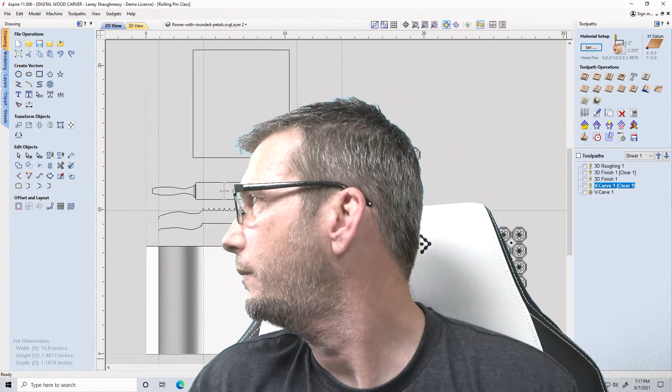As you can see, I already have a project kind of pulled up to show you. I want to talk to you about some different designs and patterns and things, because we have the holidays coming up—Halloween, Thanksgiving, and Christmas—and these decorative rolling pins create really nice embossed pastries, cookies, and things like that. For those of you that have some type of rotary axis, I want to show you a little bit of that. But I also want to talk about creative ways of creating designs, maybe a frame pattern or some background texture, some really neat ways to create different elements for your signs and stuff as well.

So it all goes hand in hand. We are going to have some rotary stuff, but we're also going to talk about creating arrays of designs, node editing, and layout. Hopefully from this class you'll pick up some useful information.

You guys do well. And Russ, hopefully you have a good time at the Houston Woodworking Show. That's going to be cool for sure.

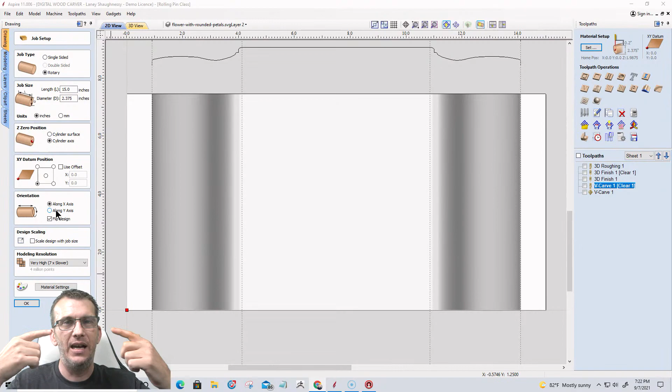And the XY datum is going to be at the bottom left corner. Always, for a rotary axis job, it's generally the bottom left corner that you're starting from. My particular CNC rotates around the x-axis, so the y-axis revolves or wraps around that x. For those of you whose fourth axis might be oriented differently, your x-axis values may revolve around your y—so basically you would just rotate everything 90 degrees. Okay, cool, all right.

Let's go ahead and get out of this. That's our job setup, and let's go into our models and turn off this current model here, and let's talk about what we've got going on. So this little mock-up here—let me get it on the screen. There we go, this mock-up here, this is what our rolling pin is going to look like.

It's going to have an overall length of about 13 inches. The actual rolling pin itself is going to be roughly around 7 inches, and then we're going to have our handles. Now this is going to be one solid piece, not separate handles that stay stationary while the rolling pin is rolling. It's going to be kind of a one-piece rolling pin.

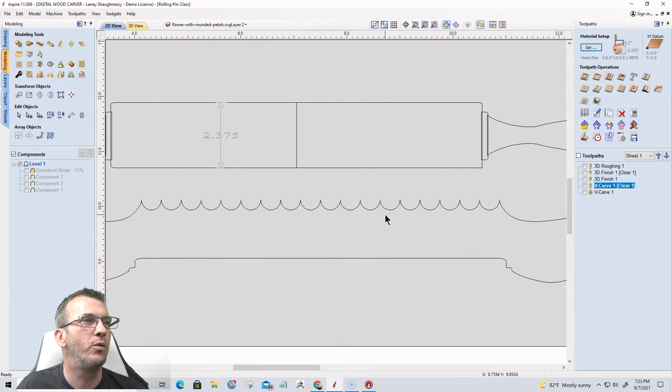There are going to be a couple of different profiles that we're going to look at, and that's these shapes here. The lower shape, the lower profile, is just the basic rolling pin design, but the upper one is going to be a pasta cutter. On this pasta cutter, it's going to cut pasta strips about 3/8 of an inch wide.

So basically what I did is I drew out the overall size of the rolling pin. I put my radiuses on it where I wanted, and then I came up with a handle design. Now on the handle design, I started off with a very simple rectangle, roughly about the size that I wanted. The overall size from top to bottom of this handle here is about 1.5 inches.

So let's go over here and go 1.5 and click apply. I'm sorry, that's not 1.5 inches. What the hell am I thinking? Let me measure—that's not 1.5 inches. Lord have mercy, Laney. Let's see, from here vertically we're gonna measure. From here to here, we're about—okay, about 3/4. I don't know why I was doubling that.

So let's go back into that shape tool and make that 3/4.

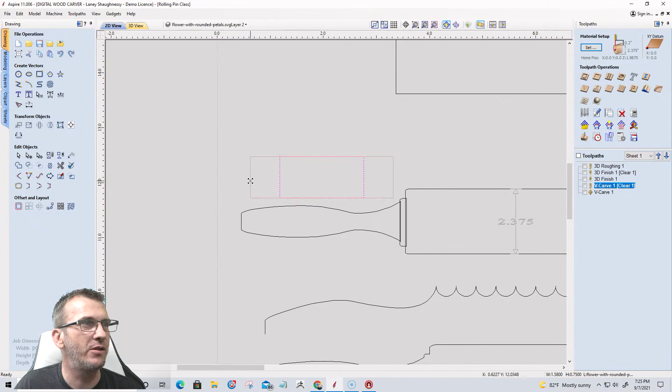0.75. All right, let's go ahead and stretch it out. I'm going to hold the shift key while I stretch this so it stretches out in both directions. And then from here, it was kind of just like, okay, what would be a comfortable grip?

There are rolling pins, many of you know, and I wish I had some reference pictures, but there's rolling pins that are just solid, almost like dowels. They may have a taper in the middle, tapering down. We have rolling pins with kind of a handle size, with the larger diameter. There's all kinds, and straight dowels where it's just the centerpiece, usually used for embossing cookies or pastries and things like that.

So the handles aren't a requirement, but for me, in the rolling pin designs I like to create, I do like to create the handles. So that's kind of where we're going to go with that.

Basically it comes down to what is a comfortable shape for a handle. So I went into node editing mode, and first thing I did is turned both the upper and lower span into a Bezier curve, so I could start to adjust my curve to get that general shape. And I want a nice transition.

Then I came over and said, okay, I want it to taper in thin, widen up a bit, and then start to taper down again. So I took my upper and lower nodes here on the end, and started to bring them down a little bit to what I thought was an acceptable size.

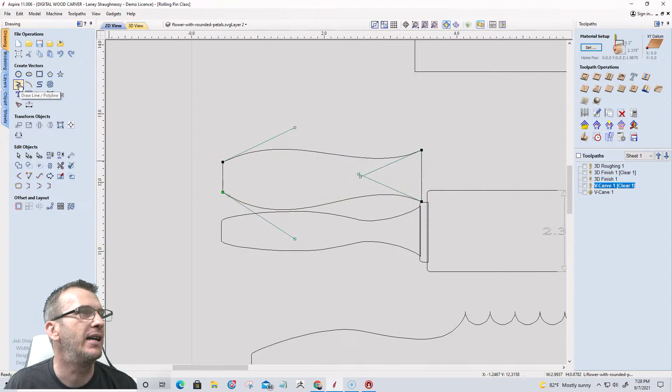So if I take a line and snap it through the center here, 90 degrees, then I can focus on one side of this handle more so than the other side. I can start to get that taper and that feel that I want, and that curvature.

Once I'm happy with that, let's move this up off the rolling pin. I can simply snip away this lower half and then mirror it down. So in the mirror tool, I'm just going to use the bottom, flip to the bottom. I do not want to flip about center, I just want to flip to the bottom.

And from there, I can now come in and trim away my center line and stuff. And if it doesn't trim, I can go back into node editing, and pull this node up just a little bit, and pull this node up just a little bit, so there's a little bit of an overlap in there, and then my scissors will come in and trim away.

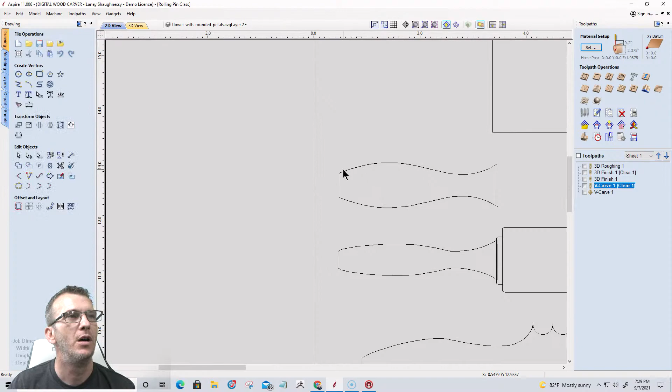The problem with doing that, though, is I've actually created an overlap on my two ends. If I zoom in, you can see my pink line is overlapping now, and I'd have to fix that overlap. Really the best way is to go into node editing and just delete the two spans. Let me show you how to clean up the overlap.

Let's do the overlap first. Basically, I'd go into node editing mode and simply pull this back till there's a gap. I would select both of my lines and join with a straight line. That would get rid of that overlap. Same thing over here, it would do the same thing as well.

But let's do it a little bit cleaner. Let's get rid of this and bring our lines back here. Now, instead of moving the nodes up so I create the overlap and trimming away, that kind of screws me up on the ends.

It's very simple: just come into node editing and put your mouse over this line, right click and delete the span. Select this one here, right click and delete the span. Done and done. So you would create whatever handle shape that you think would be comfortable.

From time to time, I may just carve a handle on a scrap piece of wood to see what it feels like. I might even go over to my lathe and shape a handle that I think is comfortable in my hand, then bring those dimensions over into Vectric and create them, rather than just free drawing it. It really depends on your workflow or your thought process on how you think about things.

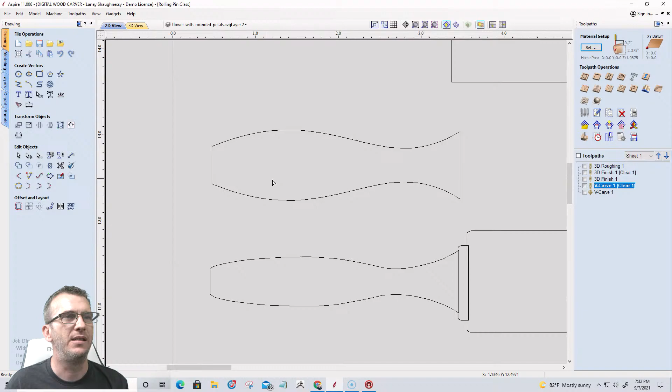So once I had my handles laid out, I knew what size I wanted the rolling pin to be as far as diameter. I wanted it to be about a little over 60 millimeters, 2 3/8 inches. And I wanted that rolling pin to be roughly about 7 inches long. That's what the shape is.

So if we go to the size tool, on this drawing here we're about 7 inches in length. It shows a height of 1.18, but this is just a mock-up drawing. It is actually 2 3/8 inches tall, this part here. Trust me, it is. It says it right there.

If I go into my measure tool and measure vertically from here to here in my drawing, it's only 1.18, but that's why I have the 2 3/8 there, because I'm just simulating what I want. I don't necessarily have to draw the whole thing, but it is easier to do that if you wanted to.

Now, let's go ahead and get rid of this. I'm going to get rid of this center line as well, and I'll get rid of this measurement. If you want all of this to be sized up appropriately, like in our middle here, go ahead and size it. If I go in here and turn this off because I want it to say 7 inches, I go 2.375, or 60 millimeters.

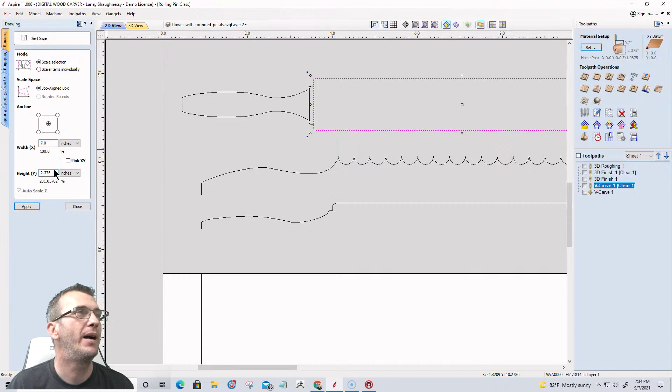By the way, let me show you, you may not know this. I'm going to go into the help menu and into the manual just to show you where it's at so you can read more about it. In the manual for Vectric, the list on the left hand side, if you scroll down that list, you're going to come down to our variables. Bear with me.

Right here are the calculation edit boxes. This will show you different keyboard shortcuts for doing things like pi, thickness, X, Y, and things like that. One of them is imperial conversion or metric conversion - M or I is your keyboard shortcut.

When you're inside any of the value boxes, you can use M or I to convert metric to inches. If somebody gives you a plan that's in metric, you can convert that very easily. 25.4 is your conversion rate, so it would be millimeters divided by 25.4 for inches, or inches times 25.4 for millimeters. You can use M and I in the software.

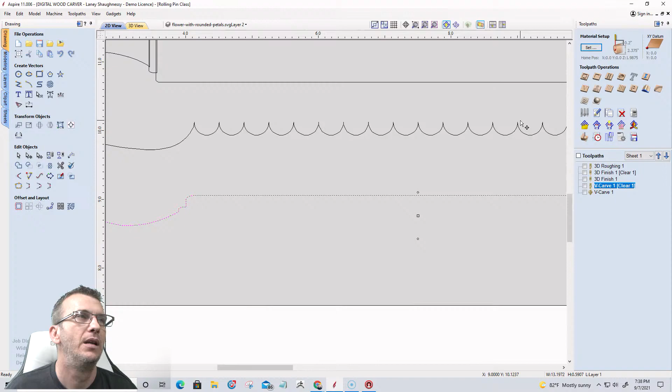I'll show you that when we do the modeling, but that's going to create like a pasta cutter. So get your profile drawn out and then create two guidelines - these are going to be our drive rails when we're doing a two-rail sweep. This is what we're going to sweep that profile along. So in the modeling tools in Aspire, I have what's called a two-rail sweep.

I'm going to show you how to do this with a regular rolling pin or the pasta cutter, and also using the molding toolpath for those of you with desktop and pro. But let's start with the two-rail sweep. I'm going to select my first drive rail on the left, my second drive rail on the right - that's my selection. Then I'll pick a profile, either one works for both. I'll sweep that profile, scale it to the size of the spans, sweep it between those spans, and click apply to create the model.

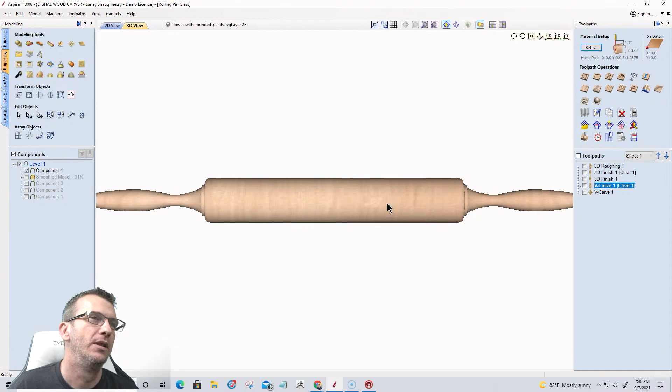If we close out of this for a minute and look at our 3D view, you'll see our rolling pin here, and that is basically quite thin. We need to fatten her up a little - this is too skinny on the handles and the rolling pin. It's not sized correctly because I was drawing fast.

So here's the deal - from, let's bring the guideline down to here. This is my radius. My handles and rolling pin need to be 60 millimeters. If I'm going to go 60 millimeters or 60.325, I need half of that - so 30.1 and some change. Let's look at what size I have here.

And then we're going to draw this from scratch. So let's go from here to here. I'm only at a half inch, right? 0.59 inches. That means when I roll this pin up, when I sweep this profile and roll it up, I'm only going to have a 1-inch diameter rolling pin. That's definitely not what we want. We're shooting for roughly 2 3/8 inch diameter, or around 60 millimeters. We've been talking about that all day now.

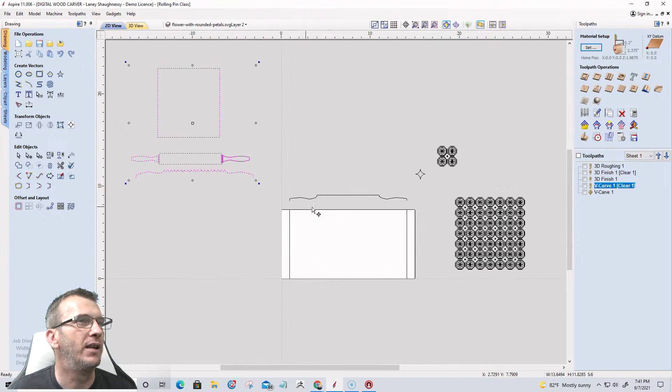All right, let's go ahead and change this up. So this profile, let's get all this stuff out of our way. Let's select all of these things and move them over here for the moment. Let's turn off our grid lines for just a minute. Well, no, let's turn them back on.

On this grid line, I need this shape to be 60 millimeters, or 2 3/8 divided by 2, and you know the radius. So I'm going to go into the properties of this bottom guideline and create a relative guide. 2.375 divided by 2 equals 1.1875. When I create that guide, it's showing me that guideline here. Let's get rid of this one, delete, this one right here. That's what my profile should be up, size should be up to.

So I'm actually going to scale this up. There we go, and that looks more like it. I'm going to scale that up. My handles are going to be the right size now and everything.

And we're going to do the 2-rail sweep one more time. Let's go in here, turn the guidelines off, and let's select this. Select this. Go into our 2-rail sweep tool and make that our selection. Make sure those lines that you draw are sweeping across from top to bottom. Make sure these arrows on the red and green line are facing the same way, not opposite. So that's our selection, this is our profile. We're going to click apply to sweep that.

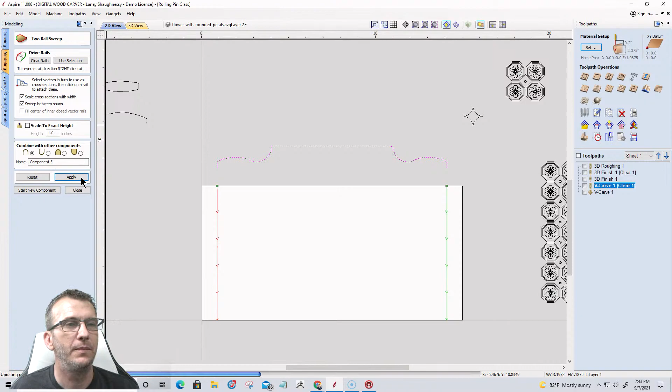And let's turn off the previous one we made. Actually, let's delete it to keep things clean. I'm going to delete that previous one. And let's go in now. That's what my rolling pin should look like.

All right, so now when it's generating its preview, it's going to be distorted. Every time I move this thing around, it's going to be distorted. But let's leave everything alone for a second, let it catch up to itself. And you're going to see that nice little transition disc I have here into that rolling pin on the handle. Let's move this out a little bit so you can see that.

Okay, so make sure that your profile is of the appropriate size, is the radius of what you're doing. So if I were to unwrap this, my profile shape, make sure it's sized appropriately before you do your sweep, or you end up with a little stick of a dowel like I had a moment ago. So this is what our part looks like unwrapped. All right, cool, let's see here.

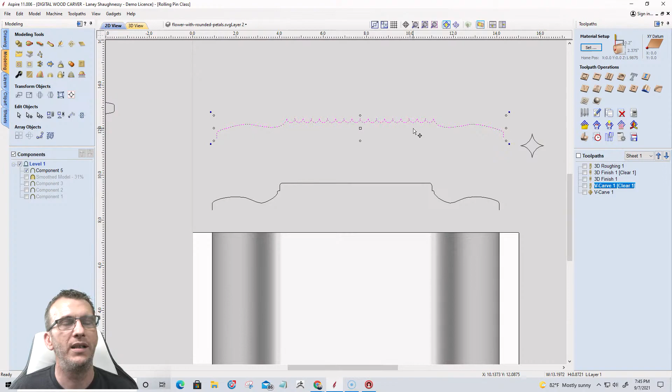Before I do that, let's go over and look at our pasta cutter. Let's come in here, and I'm going to do the same thing with the pasta cutter. I pretty much want the pasta cutter profile to be the same size as my rolling pin, but I want it to have those nice spikes in here. The thing is I need to, if I were to measure this, because I want my strips of pasta to get cut a certain size. They're either going to be 3/8, an eighth of an inch, like if it's angel hair or something. I'm not an aficionado on different types of pasta, but the size of my little gullets there need to kind of correspond.

Now, if I were to measure this right now, let's go from here to here horizontally, from here to here, you know, I'm at 3/8.

So I don't want to really distort this design too much. I don't want to stretch it lengthwise or anything, but I can stretch it upward. I'll just have to do some adjustment on the bottom of my gullets, but I don't want to stretch it long ways, because that's going to stretch my teeth apart, my little grooves apart. So it's already sized appropriately, but if I bring my guideline in here and snap it here...

And I measure, actually to the outer points of the gullet. If I measure this vertically from that guideline up to the top of one of those points, I'm only at 0.888, so I'm only going to get 875 and 875 — what is that, 1 3/4 inches in diameter — and that's not what I want. I want a nice, decent size pasta cutter, so I've got to stretch it up as well.

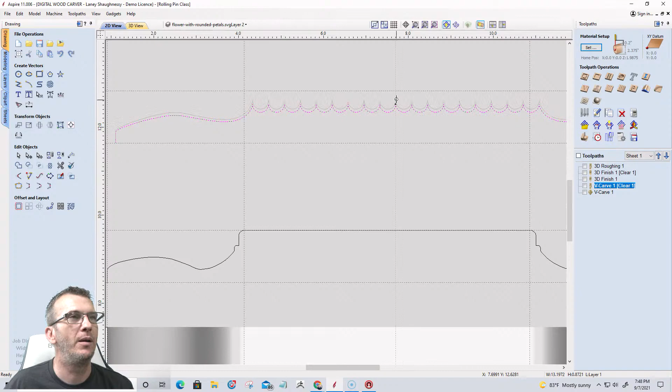And it's because of how I drew them. I was just laying out everything, but I need to bring everything up the same way I did with this lower one. So once again, I'm going to create a relative guide, and that'll show me what my points need to be brought up to, so I can drag them up here to get that height.

It doesn't really too badly affect my gullets — it made them a little deeper, kind of stretched them out a little. But I can shallow those up a couple of ways. I can go into node editing mode, select all of these nodes across the bottom here, and use my up arrow key to reduce those gullets. I don't need them too deep, so I can reduce them in a bit. What's important for me is that my points to the radius point, the center of this, is the right size.

So let's take a look at this pasta cutter. Let's turn this off. Once again, we're going to select our drive rails in our 2-rail sweep, and we're going to select our pasta cutter here and click apply, apply that across. Now I definitely don't want these nice sharp points, which you'll see in just a moment.

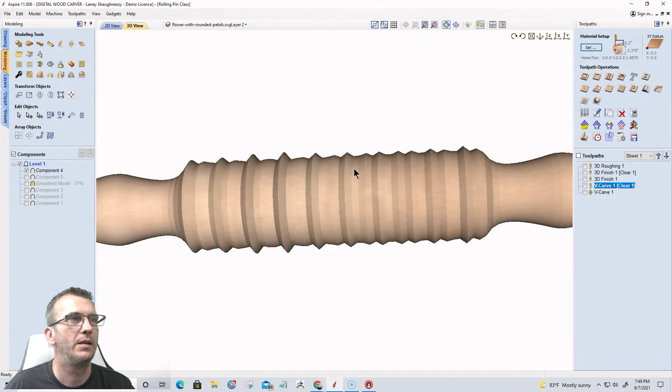Let's go into the modeling toolpath in the 3D view. Let that regenerate itself — it looks funky when it's not generated properly. All right, let's turn it sideways like this. On this pasta cutter, I definitely don't want these sharp points, okay? I want to blunt them up a little bit, and that smoothing is going to help me with that.

So let's unwrap this into a flat plane, and you can see those spikes in there, those sharp edges. Even though this is going to be a pasta cutter, I don't need something that thin and sharp to cut the pasta. So I want to slightly round over those sharp tips, and I'm going to do that with the smoothing tool — I'm going to apply some smoothing to this.

If I go too crazy, it's going to really round off those edges, and I don't want to do that — I just want a small radius. If I have no smoothing in it, I've got those sharp spikes, but I just want to bring them down just a little bit, to where I start knocking off that sharp edge. So I'm going to come down just a little to where I start getting that little bit of rounding.

But you can see these kind of white center lines show up there, and there's still a bit of a point. It's nice and rounded, but there's still a little point — it's just not so sharp. Again, if I go too much with the smoothing, I really start rounding those off, so I want to back it off a little. I just want a little bit of rounding.

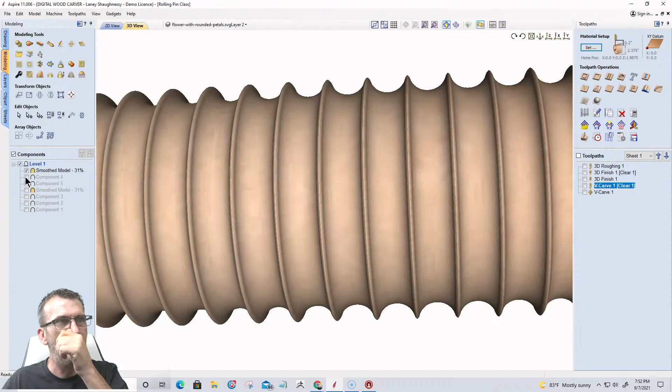Okay, so there's my smooth model. Let's zoom out here, and on this one, since we're cutting dough and pastries and stuff, I'm going to be putting some decent pressure on there. So I want my handles a little bit wider, so you can see they're just a little bit more blunt for me to really push into and everything.

So when it comes to rolling pins, if I was on a CNC where my X values wrapped around my Y, then everything I'll be doing here would be rotated 90 degrees. But my Y axis, the height of my computer screen, wraps around the X for my 4th axis on the DWC 2440. So I'm in the horizontal X, and the Y values are wrapping around that X. So everything I'm doing here, if your CNC is set up differently, where your 4th axis is along the Y, not the X, just rotate everything 90 degrees.

Now let's go back to our previous component, our previous rolling pin. Notice the handles are a little bit more narrow here, because I'd like a little bit of a grip, but I don't want to grip it tight because I need those to spin in my hand. There's not a drive shaft in the middle where the center rolling pin is rolling and my hands are just staying stationary. I've got to let it roll in my hands as I'm pushing down.

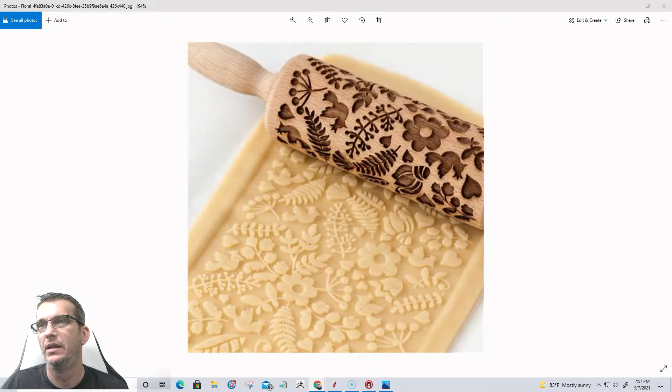And now let me show you an example of a 3D model being carved into a rolling pin design. Let me pop that in—bear with me a second.

All right, let's go back to here and pull this over here. This is an example of a 3D model getting carved in. In this case, this looks like it was probably hand carved, I don't think it was CNC carved. It's a little rough around the edges, but this is a nice little handmade rolling pin that somebody engraved this model design into, and you really look at that pastry and that embossing it created, and it's really, really nice.

You can imagine different types of breads and pastries and cookies, pie crust, whatever the case may be, having some really nice design. I really like that three-dimensional aspect of an actual 3D model getting carved in that negative state into the material, so it creates this positive, really nice embossing. We can achieve this with V-carve designs as well, which you'll see in just a moment, or laser engraving. Some really nice examples there that I wanted to share with you.

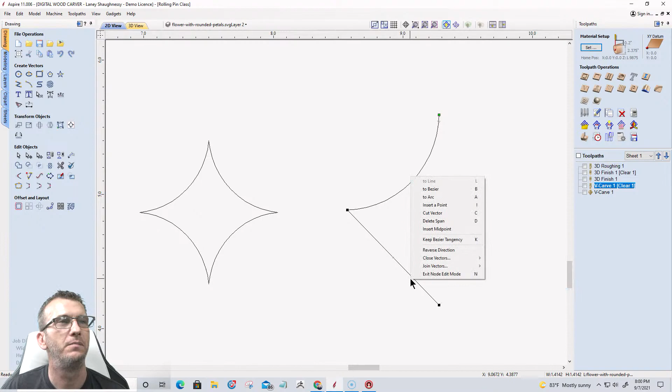Now that I've got that curve, I'm actually going to delete everything else. And then I'm going to take my mirror tool and flip that shape, bottom, left, right, to create that same shape. Take those four parts and join them together. So that's the long way around. Otherwise, it's an internal radius - a rectangle with internal radius to create that same shape. So either way gets you from point A to B, you're just learning the different ways to do both.

Okay, so let's get rid of this. Now, overall, this shape size here, if we look at the size tool, it's a little over 1 inch, 1.0667, and for those of you that are like, 'all right, now he said he was going to use metric,' it's about 27 millimeters.

The 27.09, but roughly about 27 millimeters. To come up with that size, I basically said, okay, I have a 7-inch area that I'm going to be putting this pattern on - that's my rolling pin, the main body is 7 inches. I want to be a little in from the edges, and then I laid these out end to end to see how many or what size I needed to get that nice fit. This was the size I came up with on that 7 inches.

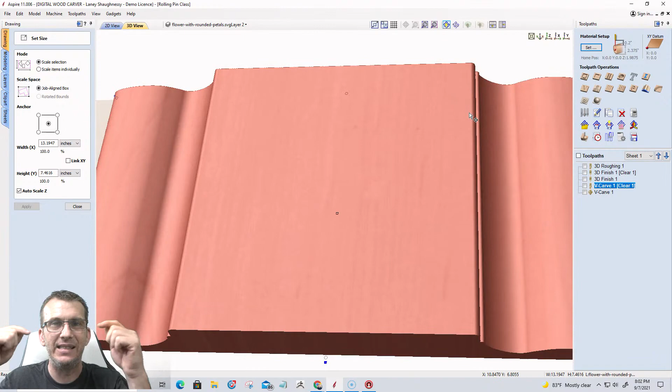So what I'm going to do is grab this and drag it down here. Notice I'm halfway on, halfway off my board. This guideline shows me where my point ought to be - that's where this starts radiusing over on the edge, and I don't want this pattern to fall off the edge into that radius. So I want to be just inside of that. I drew some guidelines to show me where that falls.

But now I'm going to go into the array tool. The goal for this is I want one row to go end to end, side to side, full length. But then I need my upper row to actually - let me draw this out to show you.

Imagine, if you will, that I have these end to end, and then I have another part coming in right here. Snap to the center there. And then if I took these parts—let me take this and this. Hold your shift key, not your control key. There we go. And I bring these two parts up to here. Then I create this pattern where I have this little circle with this little star inside of it, when everything gets laid out.

So I need my parts to go end to end, but I need them to step down halfway on my y-axis. So the x-axis is going to be full length, y-axis is going to be half length. And then I'm going to be stepping over half the design as well.

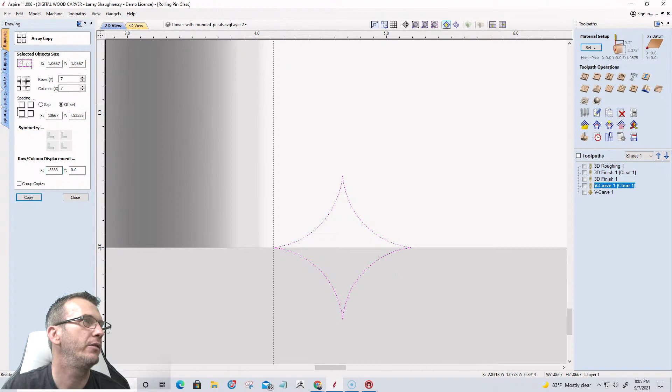And this number here is exactly how much I need that second row, every other row, to step over. So that number is going to actually fall there too: 0.53335. So when I copy this, it'll create—it'll start creating this pattern. Now I only created part of it, but it'll start kind of creating this pattern. You see how they fall into place.

Now let's create the real deal. We have 7 rows, 7 columns. We're stepping over 0.5335 here, 0.5335, and this needs to be 1.0667. And when we create that pattern, you can start to see that pattern emerge. So we have these nice little stars inside these circles when everything lays together.

All right, now I need much more than 7 rows. I actually need 16 of them. So we're going to go select our part, and we're going to go 16. Copy. Okay, it looks all crazy now, but it'll look cool when we carve it and all.

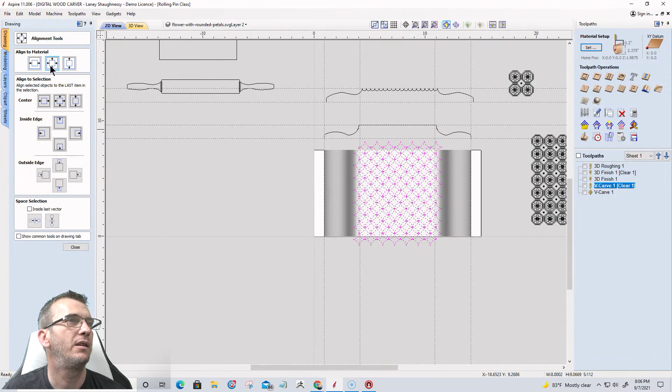And now with these parts here, I want to center them using the align tool. I want to center them on the material here, and then everything outside of my guidelines I need to get rid of. But I don't just willy-nilly delete it, because you're going to play havoc trying to catch up on closed and open vectors and all that stuff. So I'm going to draw a perimeter—I actually have that rectangle right here for myself. We're going to draw a perimeter, and I'm going to center that on my material as well.

And basically it goes right to the top edge, it goes right to the bottom edge, and then here I have it cutting off right at the tip of this part on the left, and right at the tip on this part on the right. Now you're saying, wait a minute, you said you're going to use your guidelines—that's for the next pattern, you'll see that in a minute. This one is tip to tip. I want a nice full circle on each end, so a full circle here and then a full circle here.

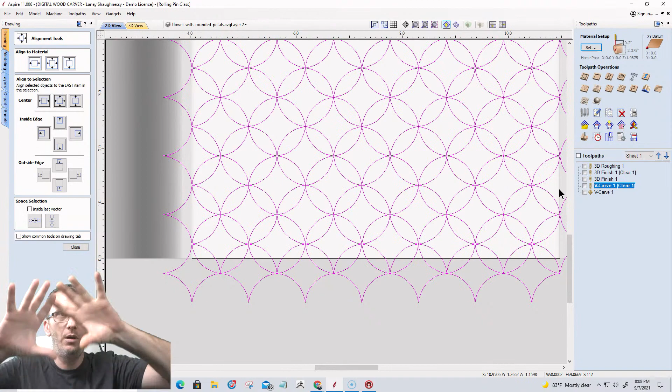So I want that full circle. I'm going to select all my little stars—let's turn this off—and I'm going to hold down the shift key and turn off the rectangle. I don't want that selected first or in the middle; I want it selected last. But first I'm going to group all those stars together so the software treats it like one object. Now I'm going to come in and select my little border last, and go into the trim tool—that's the icon that looks like a little candy cane or barber pole. That's your trim tool. And I want to clear everything outside of that boundary, that rectangular boundary. I want to get rid of everything, so I want to clear it all away. Okay, cool.

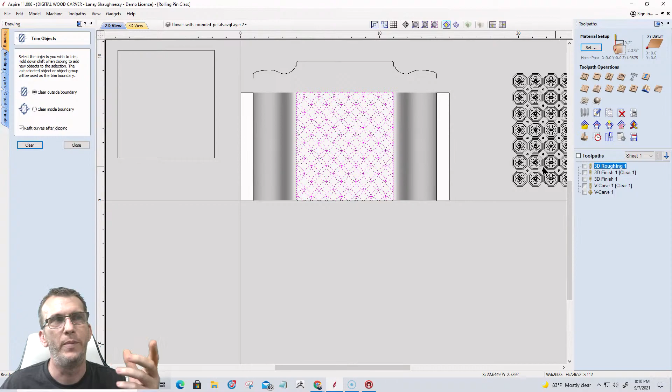But now that I have this pattern here, this is going to be a V-carve. Our first step is to create our 3D rough cut toolpath, then our 3D finish cut toolpath, and then we'll do our V-carve toolpath on this pattern. I'll also show you some other pattern options - I've got one I really like and I'll show you how to make that from scratch. Let's start off with our models visible.

We're going to go into a 3D rough cut. First, I want to go into my material setup and make sure everything is set properly in the center, with no errors - all that wonderful jazz. I'm good. So on the 3D rough cut, I'm going to use a 1/4 inch end mill to hog away the waste material.

I'm going to use the model as the boundary, because my model only goes up to the end of these black boxes right here. I want the outside areas not to be cut, because that's where my spur drive and live center are - or if you're using a 4-jaw or 3-jaw chuck, we don't want the router bit getting near those. I'm using the model as a boundary, just doing a Z-level raster to hog away the waste material, and we'll calculate that toolpath.

That toolpath is just going to remove all that waste material, mostly around the handle area and everything, and it's going to start creating that rough taper that you see here.

For the 3D finish cut, I'm actually using two bits. One is an 1/8 inch tapered ball nose, the other is a 16th inch. The 16th inch literally only does two little strips - it's going to do a bit of touch-up right on these radius edges where my 1/8 inch is a little too big. Honestly it's probably like a 3 or 4 second run, not long at all for that smaller bit. You might decide you don't need it, but I wanted to put it in there. So I'm using those two bits.

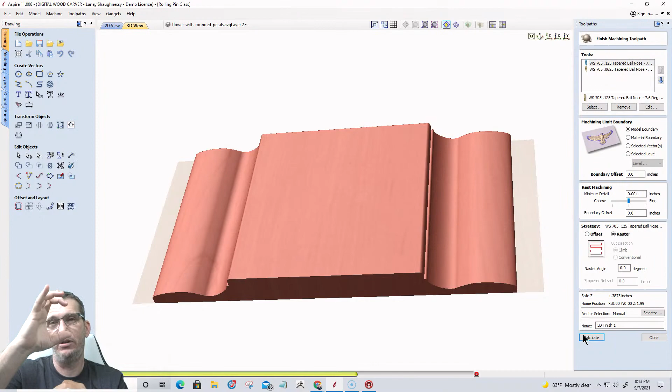Based on our large tooth pulley on the fourth axis and our small tooth pulley, we have that 1/3 ratio for the belt, and our calculation is based on that large diameter teeth, small diameter teeth ratio - it calculates the steps per unit automatically, and it's built into our software. I wrote the code and it's built in. I don't have a video on that, but that might be something I can include next week, Kool-Aid. I can put together a little Excel spreadsheet or something for you.

In our controller software, Planet CNC TNG, there's an automatic function called a step calculator. It's a little code I wrote where you can type in your diameter and it automatically calculates the steps per inch based on your pulley settings for that unit. I could do a short segment on that with an Excel spreadsheet to show you the math behind it.

As usual, Laney, stellar subject matter. Thanks, Dean, that's a hell of a word. Stellar, that's cool, thanks man. I appreciate that, Dean. I really appreciate that very much.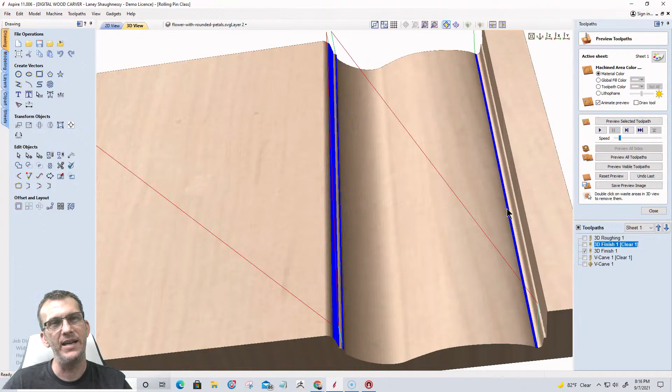This 3D finish toolpath is literally only doing this little step right here where the 1/8 inch couldn't really get in to create that nice little step. Then it's cleaning up this radius on the outside edge of the handle, coming in and just touching up those areas.

Let's see if we can draw the tool there. Is it on the wrong side? It's on the wrong side. Let me see if I can speed that up just a little bit. It might not draw the tool because I clicked that after the fact to show the tool.

There it is. So it's literally just coming in and cleaning up that little transition into the handle, and then it's going to come over and clean up that transition at the end of the handle. We can turn the speed back up - at its most, it's just a few minutes, it's not going to take long to do that nice little touch up.

All right, so now that we have our part, let's zoom back out here. We've got our part cut, and if I wrap it up, you can see where we're at and the two ends there. Those get cut off once everything's done, and then you clean up the edges with a little sanding. But this is our rolling pin before any nice detail or anything is carved into it.

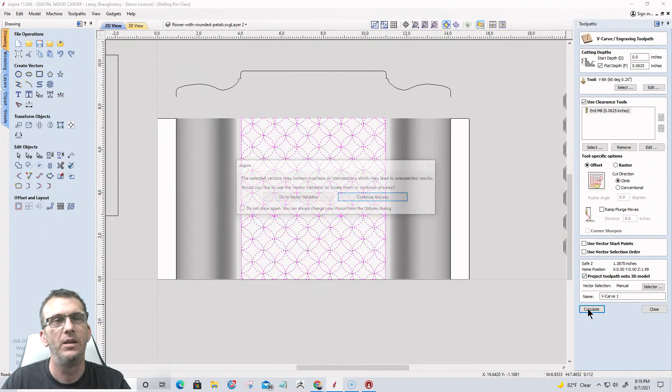Now that warning that popped up is letting me know that some of my vectors are overlapping, and I know that some of my points and everything are overlapping, and that's fine. I want them to kind of be touching, and I'm not going to weld them together or anything. There's no need for it. So let's unwrap this into a flat plane, and let's preview the toolpath.

But wait, there's more. Look, remember I said that the ovals are going to get cut, and the little diamonds, or the little 4-pointed stars, they're going to be raised. Well, that is completely opposite of what I'm seeing here, and that's not good.

I need to reverse that. So in order to reverse that, I got to create a boundary around it to be able to use to almost create that extra line. And that is going to be this bad boy right here that we used earlier. I'm just going to center that back onto the material, and I'm going to select this.

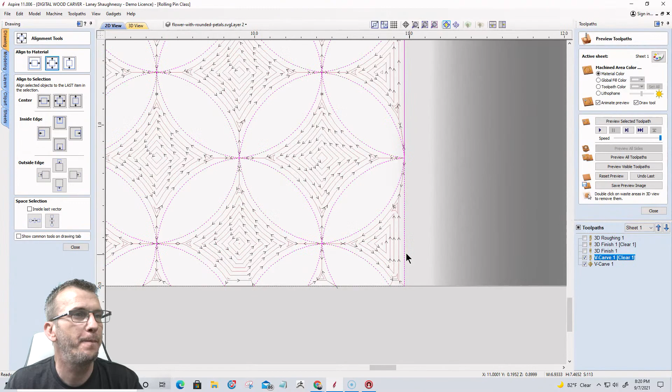Let's undo that for a second. Oh, not that far. Let's move that back over. Where'd my rectangle go? Oh, you son of a gun. Put that back there for a minute.

I want to take, and on the sides here, I want to bring them in just a little bit. So let me turn off these toolpaths. I want to select this whole thing, this whole pattern here, and I'm literally going to kind of slightly squish it in just a little bit.

I mean, literally, I'm going to zoom in really tight, hold down the shift key, and I'm going to bring this in just a tad, not much. Because when I bring this in and center it, I need that small little gap between that rectangle and my pattern. Not a big gap, just a small little gap. I want it to be virtually invisible, so I don't want it too wide. And I'll be able to tell, and I'll show you if it's too wide. We'll see that in the design in just a moment here.

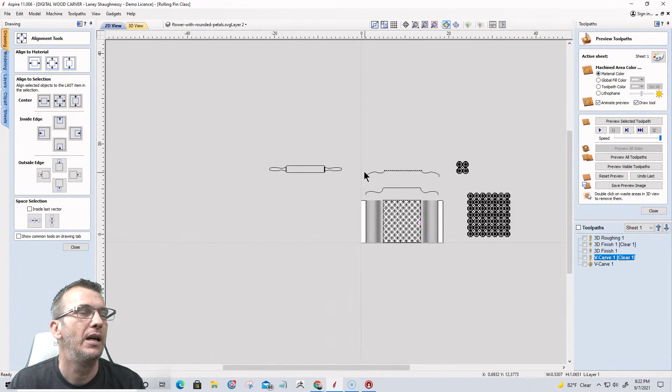So let's look at my height. You see that width right there above? That's kind of really what I want to be on the sides as well. So let me do that. Let me zoom back in. Let me bring that in. Just hold that shift key so it does both sides at the same time. And I really want to bring that in. I want it to be super, super close.

Okay, virtually invisible. All right, now when I select all of this, I'm going to redo that toolpath. Let it calculate. Now you can see that I'm getting the correct cuts.

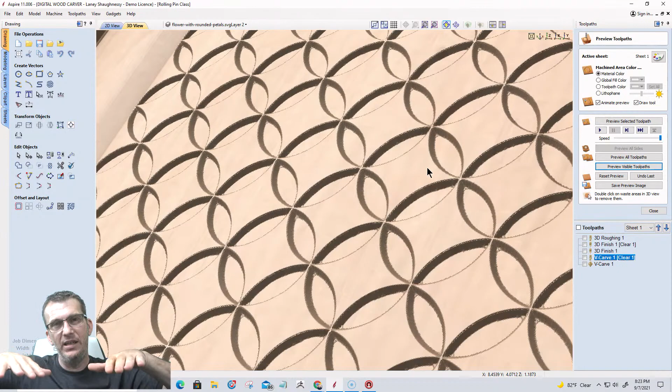So let's preview that visible toolpath and do that carving and everything. And now you can see I've got those kind of stars raised up. So when this cookie decorator gets cut in, these stars are going to get pushed down in, and the dough is going to puff up into these pocket areas to kind of create this nice, cool pattern. Okay, so now that I've got that, let's wrap this up.

Let it focus. Let's turn it a little bit so it's not so whoa on our eyes, and so you can see that pattern here that got created. And this is just using a V-bit and a small end mill. This could have been laser engraved if I wanted to use a laser, or it could have just been pocket cut, straight pocket. I like using the V-carve toolpath because it gives a little bit of an angle, so when that dough goes up, it has a draft to it so it comes back out. It doesn't get stuck on the straight sides. So I kind of recommend the V-carve pattern.

Now the tough thing about the patterns is, the same way I created this, I could create all kinds of patterns for picture frame or molding designs, like embossments and stuff. It could be floral, it could be this, it could be that.

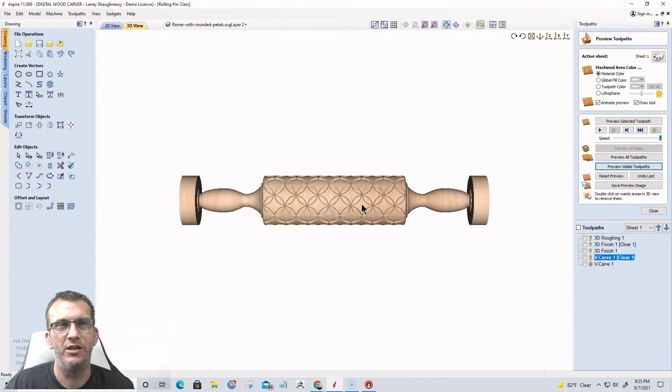I could create this as a pattern for the bottom of a tray, like a butler's caddy or a nice little dinner tray that could have the whole bottom with this decorative pattern. I could really do all kinds of fun things just creating patterns for my V-carving, not necessarily for rolling pins, just in general. These repeatable patterns can be spread across and sized to create all kinds of unique things. With that in mind, let's talk about this pattern here.

Now I'm going to go over to the left and draw it from scratch. It all starts with an image, right? So our vector—let's import a bitmap.

Online, I typed in 'flower petal vector,' and the image I got was a rounded flower petal SVG. If I import that in, let's move that up here—that's this guy right there. So it's an SVG, I didn't have to trace the photo or anything. It came in as an SVG, and all I had to do was get it sized down to an appropriate size.

What I wanted was on each of these octagons, I wanted the outermost octagon size to be about 1 1/16 of an inch. So I started from there, traced my image, and then came into my polygon tool doing an 8-sided polygon. I want to create that shape and have that size be roughly 1 1/16 by 1 1/16 in size.

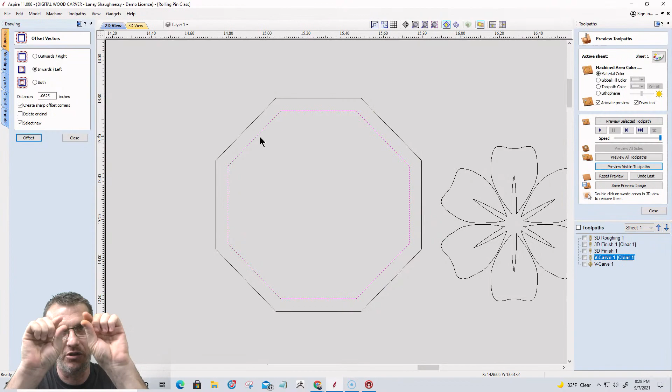And then from there, I want another little strip as well. That vector is going to be offset inward by a 16th, so 0.0625. What that's going to do is create this little strip here, and that part's going to show up really nice in the embossing.

From there, now I can bring in my flower, select that, select this inner vector, and align it to the center of that last selected vector. Group your vectors there, child of mine. These are all individual petals, right? So when I centered it, it shrunk them all up. Group your petals—I'm going to hit G on the keyboard for group, that way I don't have to mess with it.

Now I'm going to select this vector here and align it to the center. I want to size it—and I actually did pretty good right out of the gate—but I want to give it some size and some space.

Now if we compare this one to these, my flowers in these are just a little bit smaller with a little bit more room around. You've got to think about that dough and all that stuff, so I'd agree this would be just a slight bit smaller. Holding that shift key, grabbing one in the corner, bringing it in just a little bit to have that pattern. All right, so that's how we created that.

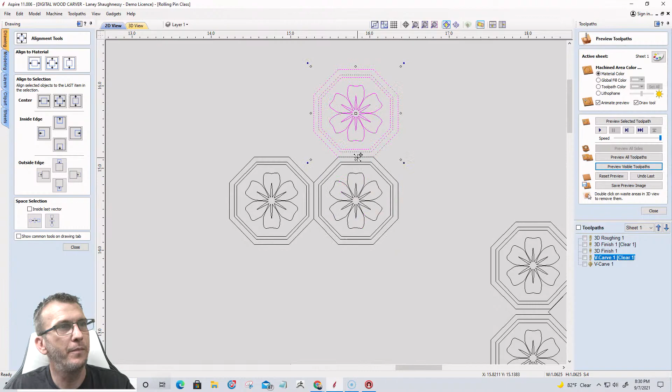And then I'm going to hold down the control key, grab it at the bottom, drag that up here, hold down control, drag this over here. So I have these four. Now I want space in between. That's going to create kind of a lattice work, a grid.

So these two, I want to do about a 1/16 of an inch of space, so I'm going to move them up on the y-axis relative a 1/16 of an inch. Then these two on the right, make sure you get all the vectors, I'm going to move them to the right a 1/16 of an inch. That's on the X. And that gives me my spacing that I want for this pattern.

And then I'm going to come in and draw a rectangle. I'm going to rotate that rectangle 45 degrees, and grab this in the center and snap right to the center of that one. Then I'm going to size this rectangle down holding the shift key, drag these sides in so they snap here, drag this in so it snaps there.

And what this does, the reason why I'm drawing that rectangle and sizing it up - oh, let me fix this. The reason why I'm sizing that rectangle up to that is because it gives me a center point. I'm all about kind of smart design. I could have measured and drew lines, right? I didn't have to draw a rectangle and get it all sized to get that center point. I'll show you another way with a line.

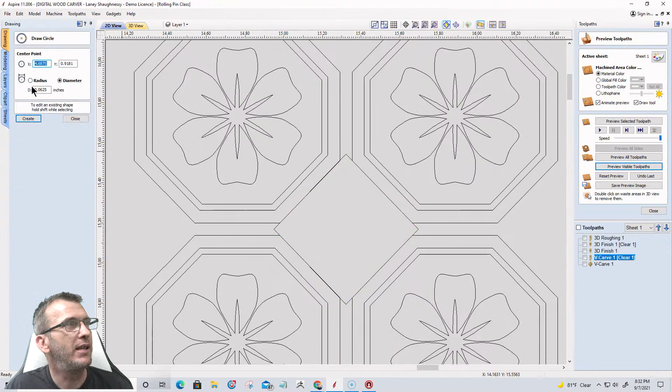But what that did is I want to be able to put a 1/8 inch diameter circle, snap right to the center to drop that in there. And then I wanted to put a 1/16 of an inch, 0.0625 circle right in the center of that to create that. It's going to create a nice little dimple and everything. And once I created that, I don't need that rectangle anymore. Now I have my pattern that is going to be copied multiple times over to create this nice little wall pattern, or whatever it is, right?

And I'll show you how to do the array tool for this. We're not there yet, but so I have this kind of pattern laid out. And for this, knowing that I'm going to be stepping over a 16th and up a 16th on my spaces here, here's what we're going to do.

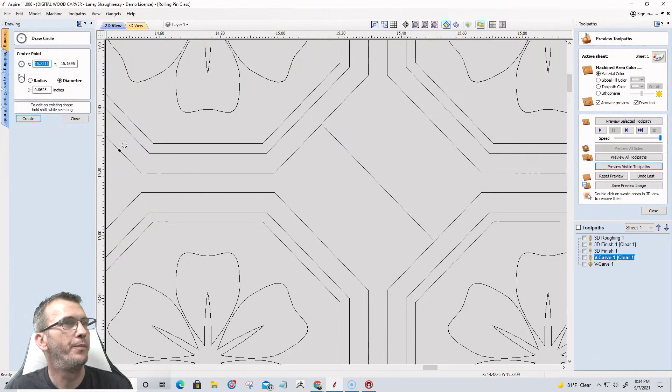Now that I have kind of the layout that I want - oh, before we do the layout, let me show you another way I could have done this. I could have taken a line and drew a line from here to here, okay? That's all I would have needed. I could have then taken my circle tool, come right over and snapped right to the center of that line and drew my 1/8 of an inch, 0.125, come over here to the center of that line again and drew my 1/16 inch, right?

I didn't have to do the rectangle thing and rotating it and sizing it and all that. I could have just drew a line to get that center point, you know? I'm just kind of showing you different options, long way, short way, all kinds of ways. There's more than one way to get from point A to B.

Okay, so now that I have the general layout, I don't need these two, and I don't need this one. All I need is my circle and my part right here. Now let's go in and move this to a new layer. I'm going to call it pattern 1A. I'm going to turn that visibility off and get rid of that, and bring this part over here.

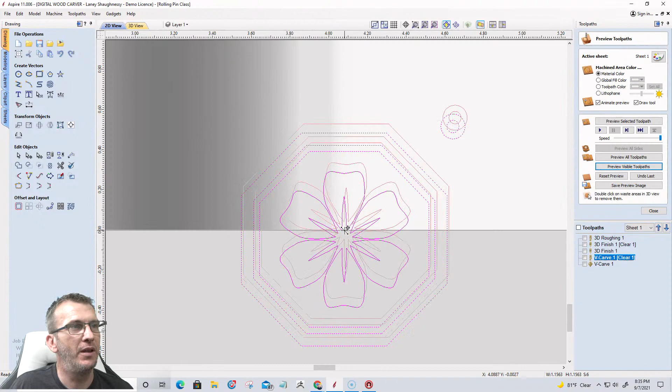I'm going to come down - remember, this thing wraps around, my flat layout wraps around, right? So there's going to be a seam on the back side, on this wrap. So I need half of it hanging off one side, half of it hanging off the other, kind of thing. And also on this here, I'm going to just kind of snap it up on the line there. And then I got to turn my guidelines back on, because this is the one that this guideline gets used for.

And I'm going to grab this and snap it right on that guide at the center point. Okay.

Now that I have that, I can come into the array tool, and on this one it's going to be 6 rows, 6 columns.

Now this part is 1.1563, so on my offset here, it's going to be that 1.1563 plus the 16th of an inch. From the left side of one part to the left side of the other is the full size of the part, 1.1563, plus that 16th of an inch gap that I want. So hit equals on that.

And the same thing for the Y, so it's going to be 1.2188. There's not going to be any displacement on the rows at all, they're going to go nice columns and all. And we're going to go ahead and click apply to create that pattern.

Okay, now I actually needed one more row, so let's undo that. Undo, and 7 rows.

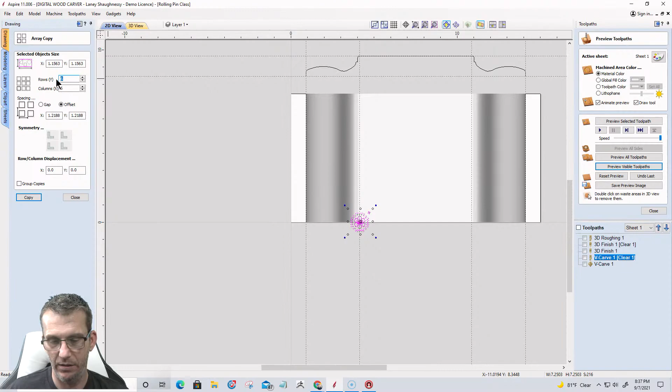Okay, now on this I didn't quite land at the center, right? So I need to either resize my part so that when I do my rows and columns it lays out perfectly in the center, or I could come in here and...

if I remove these circles, they don't need to be there. I could look at if I take this, and also I needed one more there, but if I come over and center that on my material, I can look and see where it's getting cut off.

So it's getting cut off here. That means that this part right here, this upper part, that should be this part here, and it's not. It's a little taller. So I'm going to have kind of a funky looking flower on that back side if I don't fix that, if I don't change that and everything.

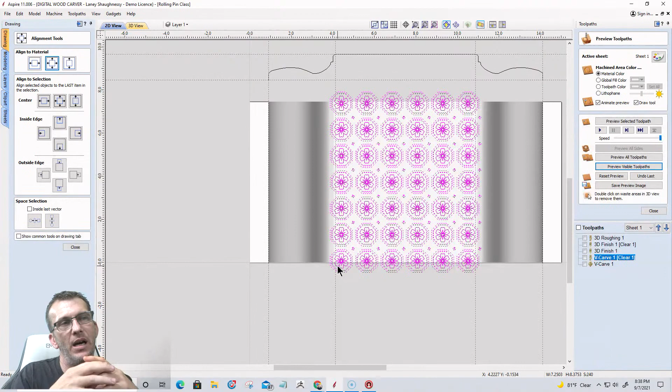So I have choices that I need to make. I either need to size the part up and I can kind of do my layout and see what size I need to be at, or I need to increase my spacing to push each of the rows up a little bit. So instead of that 1/16 of an inch gap, it might be 0.08 or something like that to kind of bring things up and down some.

Because I already have this here, what would I need to do with each of these to space them out to get that centered there, right? So a quick way for me to figure out what my spacing would be...

is to go ahead and pull this guy up to there on my line, because he'd get cut off halfway here, cut off halfway down there, and when the two parts come together it creates the hole, right? And when I bring this up, I can measure vertically from here to here, which is 0.3028.

And I need that to be divided between 1, 2, 3, 4, 5, 6 spaces. So I'm going to utilize one of my boxes here. I'll just select something, and if I go 0.3028 divided by 6 equals, I get a spacing of 0.050467.

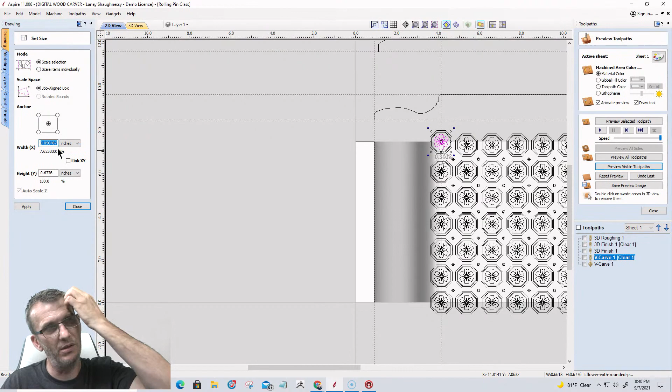Now, right off the bat, that immediately sounds off to me because I'm already spaced out a 1/16 of an inch, right? So I got to take that into account.

All right, so let's do this. 0.3028 divided by 6 equals, that gives me that 0.05. But let's do it like this: 0.3028 minus the 1/16 of an inch that I've already got in my other spacing equals 0.2403. Divide that by the 6, and this 0.04005 is what I need to add to each of those 1/16 of an inch to level that out.

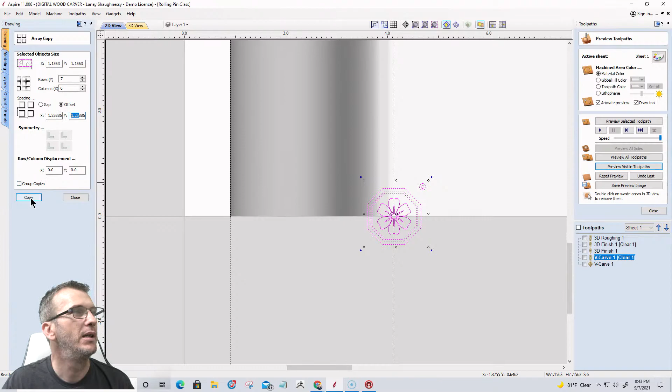1.25885. Make sure I don't have too many decimals. When I copy this over, okay, oh, I overshot it. How the hell did I overshoot it? Okay, I overshot it. So there's something I missed on my math.

What I missed, ladies and gentlemen, throw it down in the comment section. Need to minus the original size, Philip Piper says. I think I did the 1/16 of an inch. I'm working on the gap. Tell me if I'm thinking wrong, the gap doesn't look right, right? So I had to subtract the original 1/16 of an inch from that 0.3028, I think is what Philip was talking about.

But just imagine if this did work out. We're going to fix it here in a second. But you see my circle is now no longer centered, so we've got to fix that.

Now, one way or another, I'm going to try a different method to help me lay out my parts, because I overshot this spacing by so much. I'm going to find out what that overshoot was, measure it, divide that by 6, and subtract that from my thing here.

So let's go into our measure tool, and let's measure from the center of this part, where I need to land, to this edge right here, vertically. 0.0918 — so I overshot it by 0.0918.

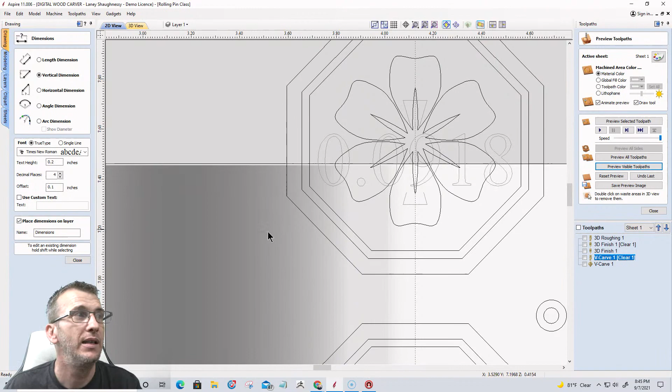Now if I take that 0.0918, and I'm actually going to open up the calculator for this since I'm not great at math and don't want to use any of the boxes over here right now. If I take that 0.0918 and divide that over those 6 gaps, that gives me 0.0153. Copy that.

And if I come back into my array tool, let's Control Z to undo, select this, and if I subtract minus that, equals — hope that I'm doing this right, 5th time's a charm — 2, 4, 3, 6.

If I copy that, I should land right in the middle. So we get to it, right? We get to it. Yay.

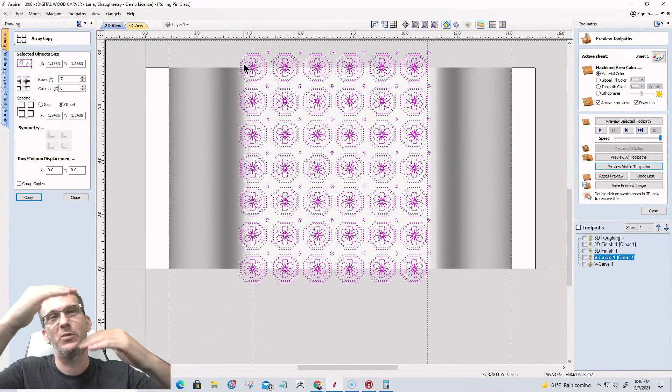Took a little while to get there, but we got there — about 15 minutes to get things figured out. I got 6 spaces in there, and I need to spread the spaces out a little bit so it lands perfectly, so I can cut the top half off and the bottom half, so when it wraps around they connect. I got to figure out, okay, how do I get there? What's my spacing and everything?

Now, on the circle here, we've got 1, 2, 3, 4, 5, 6 columns and 7 rows. So what I'm going to do is select the circles and delete them. I'm just coming in and selecting all these circles and getting rid of them. I'm not going to recreate the whole array, just going to make a new array for these circles.

On this here, same way I showed you before, I'm going to draw a line from the center of this part to the center of this part. Space bar to finish. I'm going to take this circle here, grab it right in the center, and snap it right to the center of that line. I'm going to get rid of that line.

Now I'm going to take this part here and I need to create my array — how far does it need to go over for that center, right? The easiest way for me to do it is to draw another line here, spacebar, grab this circle, make a copy holding that control key down and snap this to that line, and then measure from the left side of this part to the left side of this part.

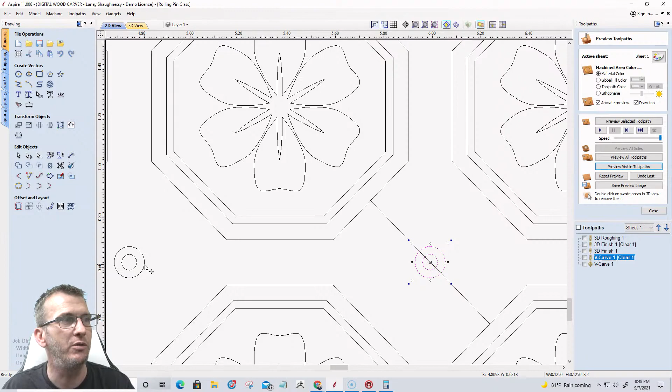So if I come in and measure, or the gap between — we can do gap this time, we'll do gap. So if I measure, because it's going to be the same horizontally and vertically, I just need to measure once. From the edge here to the edge here, the gap in between the two parts, that's my offset, okay?

So 1.1186, I can delete those two parts. Select this part here, go into the array tool, 6 and 7. Copy it. Oh, you son of a gun. I was in offset, not gap. Undo. Change that over to gap and do it again.

There we go, now I got my dots in there, all centered and everything. Now I can get rid of the things I don't need. I don't need this outside row here, or this outside row here. Now I need to trim these parts, cutting them in half and stuff.

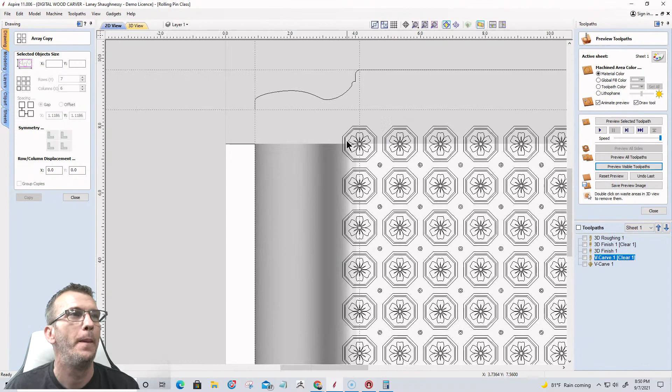So I'm going to use my rectangle again. The rectangle is going to go right up to this edge here, where this box is. So let's draw a rectangle this time, go right to this guideline, and right diagonally down on the guideline. I'm going to zoom in and make sure I hit the guideline, which I didn't.

Okay, it needs to be... oop, that was a corner box, not the center box. Let's go into the center box, pull it over to that guideline there, come over to this side. I landed right on that guideline. That's great. Make sure I'm on my lower part, which I'm not.

Just off of it, so let's come up here and drag that down, snap right to that. Make sure I'm good up here. Nope, just a little high. Zoom in really tight, pull that down to there. Okay, so now I got my border that I'm going to trim to.

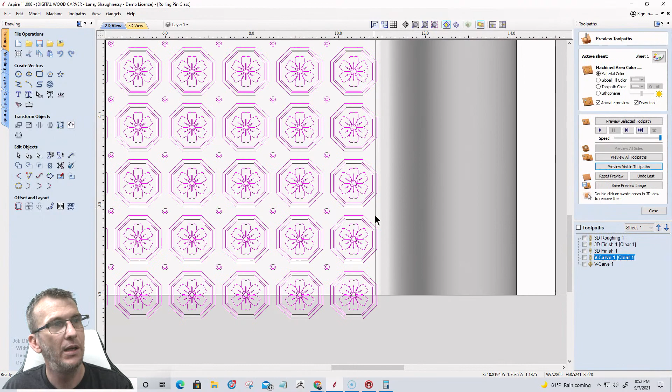Select all of our pattern, turn off these guidelines. Come in and deselect the rectangle and then select it again, so we want it last. But I want to group these things together first, so group. There we go. Select that rectangle last and trim, clearing outside of the boundary to clear and redraw all those parts.

Oh Laney, you goofball, let me stop that. I want to select all these parts. I need to center them left to right, guys. So align to the center, left to right. There we go.

All right, now I want to do that. Select all those first, border last, and clear outside. Let it go through and cut all those off. It's going to take a second. Hopefully not confusing, I know it was because I screwed up my math on spreading the things apart and all that.

But making fun little geometric shapes, patterns, or repeatable templates is not very difficult. These patterns could be a wall panel on a bigger scale, but right now they're small for cutting with the rolling pin. This could be the bottom of a tray, the top of a jewelry box, the sides of a jewelry box, a picture frame, really any kind of thing you want. It could be a background texture in your carving, V-carving or whatever, where you have this background pattern and then cut out script letters and glue them to it, to create something like 'live, laugh, love' with this nice cool pattern behind it. Things like that - get the wheels rolling and be creative, right?

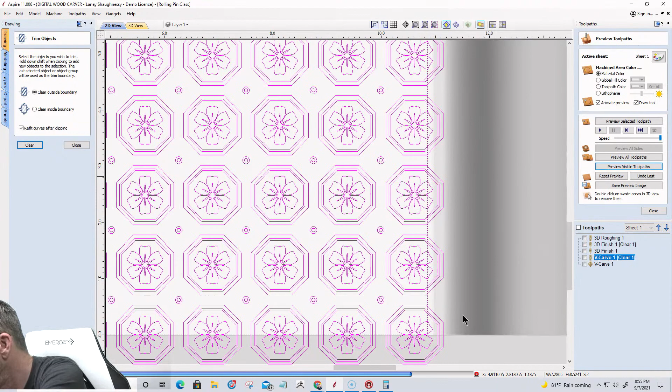You ever seen those YouTube videos where they're like, here's this check that I got and all this good stuff? I get these fake checks from car dealerships or loan companies and all, and it looks like a check. It says paid to the order of, and has this big old dollar amount, and I'm like, whoop whoop, somebody sent me a check - and it's fake. It's like you qualify for this much off a new car. It's like, man, come on.

All right, so now we got this pattern and everything. We don't need the border anymore, so I can go ahead and remove that. There's our pattern there.

Now let's come in here and create another V-carve toolpath, and then we're going to move off of rolling pins real quick and talk about one very simple, pretty cool checkerboard cutting board looking thing. Let's come in here on this pattern. Now, the V-carve toolpath is going to be cutting between the lines, skipping a line, cutting between the lines, skipping a line, and everything.

I may want to put a border on here to carve this. I'll know in two and two when I find out exactly how this is going to look. Same tools, 60-degree V-bit and 16th inch end mill. I'm going to calculate this toolpath.

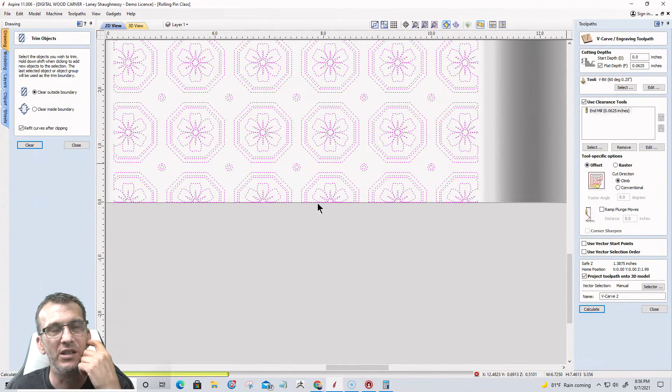There are two open vectors that were identified, and they're going to get ignored. I'll find out what those are in just a second. I think they're going to be a little trimmed piece of trash somewhere. Let's reset this preview and unwrap this part, and let's look at what's getting cut off here.

So in here, we have our edges, our circles getting cut, and I don't know, let's preview that and see what's going on. Yeah, that's the pattern I want. All right, this one looks weird in my low resolution. Let's turn up the resolution just a little bit.

Let me see here, let me go back to this. Preview that visible toolpath. Oh, you son of a gun. Let me preview that one more time. I think I want it reversed.

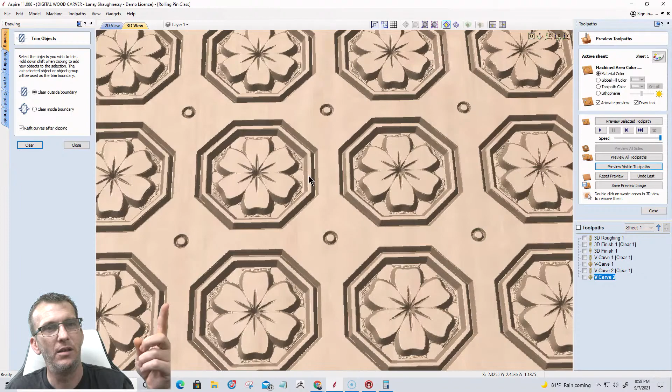I've got to think about how the cookie gets cut. I want the flowers raised on the cookie, and this would indent them in instead. I want the flowers raised, and I want this raised, so yes, I need to reverse the entire cut. And that means I do need to put a boundary around it.

Let's undo the delete of the boundary I had there, because I can use that. I'm going to take that boundary and bring it out just a little bit. Hold that shift key down and I'm going to bring it out away from that pattern just a little bit.

Just so the lines aren't overlapping and stuff. Same thing this time on the top and bottom - I'm going to bring it out just a little bit, not a whole lot, just a scotch. Okay, let's recreate that toolpath.

All right, two open vectors. Let me find those open vectors first. Select, right click... oh, come on now, stop. Right click.

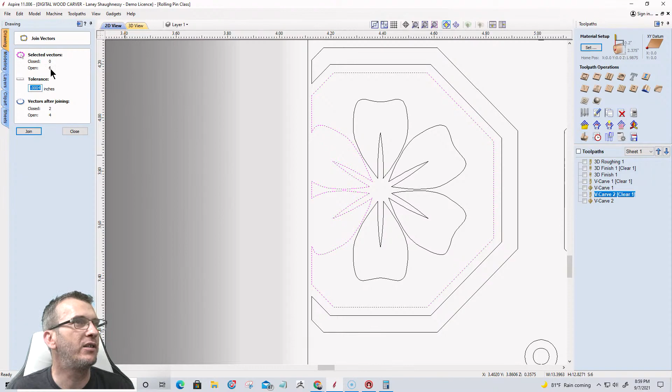Select all open vectors right here. Okay, I have this open vector right here. So let's go to the join tool. There are six open vectors selected in that little pattern right there - two will get closed, four will still be open from what I have selected here. So two, four, six. I'm going to select that again and let's come in here - that's closed, that's good, that's closed.

Let's right click and select all open vectors, zoom selected. I just told the software to select all the open vectors. Now I want to zoom in to the selected, and that's those two right there. That's good, but I should have none left in this design - it should have been just those two profiles. Let's go in here.

Calculate. So you tell it to select the open vectors, and if you can't see them, go to the top magnifying glass with the pink dotted line and tell it to zoom in to the selected item, because you just told it to select that item, so then it'll zoom right into what it selected. All right, let's reset this preview and preview that visible toolpath. Oh yeah, that's what I'm talking about, Junior.

So we're going to get nice emboss little dimples with a little boop sticking up out of it. These areas here are going to be pressed down, and we're going to have a little raised up area around the flower, and then the flower is going to be raised and the center is going to be down. That's the pattern that I want on the rolling pin.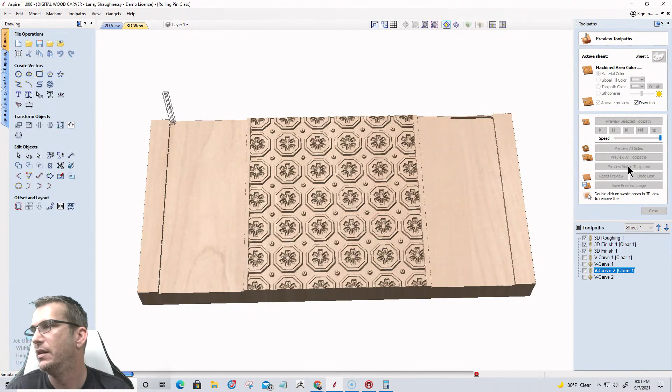So if we look at that with our 3D rough and our 3D finish, preview visible toolpaths, we can move on. So hopefully you're getting the idea of things. But Christmas trees, pumpkins, weird little things for Halloween coming up - you know, Halloween cookies.

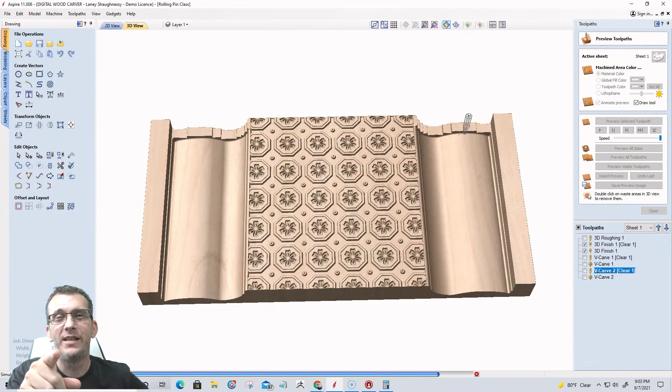Paul, I know subtitles, are they on? You said gotta love subtitles. Are the subtitles on? Because I keep getting comments that they're not. Do you get subtitles because of my country accent? My southern accent is hard to understand for a lot of people. But Paul, who said that about subtitles? Where was it, I just saw it. Paul Coffey, if you're still watching, are you able to see subtitles? Or was that a facetious comment because you wish you could see them? Let me know.

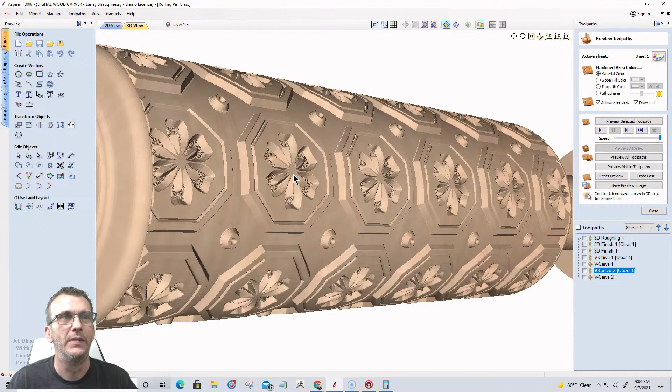Now just as an example of what this would look like if it was the cookie dough getting carved, I'm going to take this right here and create a model really quickly. We're going to go with kind of a V carve, so it's going to have a chamfered wall.

60 degrees or 30? 60 degrees, might be 30. And it's going to have a base height of 1/16 of an inch, 0.0625. And it's going to be limited to its height, flattened off at 0.0312. All right, let's click apply to create that model.

That's backwards, hold on, I think I need the rectangle on that one as well too. Let me turn off this, let me go into the 3D view. Oh, unwrap, Lord have mercy. Yeah that's backwards, hold on, let's do that again one more time.

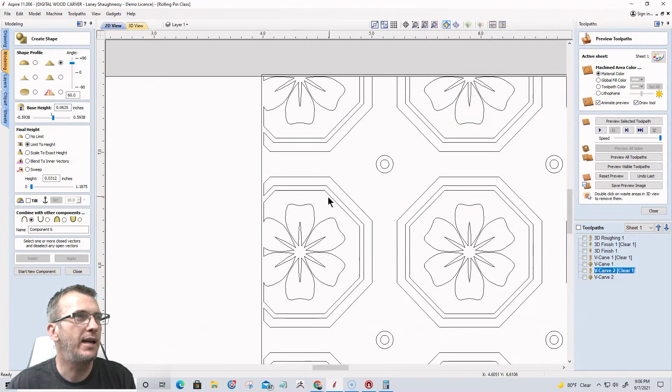Delete, go back into that shape tool and select everything with the boundary this time. I'm trying to give you kind of a three-dimensional view of what that cookie might look like. Let's apply that and see what we got here.

Oh yes, yeah, you can in Zoom. Hi Lainey, can this be done with a DWC laser? Thanks Dave Garvey, yeah, you can use the DWC laser on this for sure.

All right, so imagine, here, let's do this, let's put some meat behind it. Let's start a new component, grab just the rectangle and create a flat 1/16 of an inch base. Apply.

Okay, so imagine a cookie, right? Your cookies, your pastries on top, but it would have this kind of design, and that's a little deep. It's not quite right, let me do that again. 0.0312. There we go.

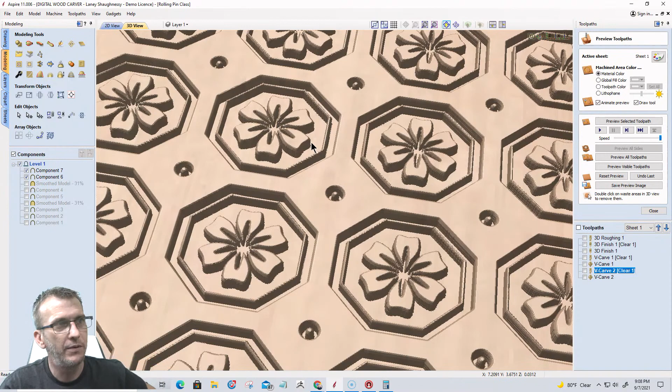So it would have this kind of pattern, a little circle with these little dimples, this kind of grid on the top of your dough, and then it would be kind of recessed down with this little area sticking up, and then the flour and everything. So that's what that rolling pin would stamp out to look like - a sheet of pastry that looks like that. And then you can cut your little cookies out and stuff.

All your little circles for your cookies would have this kind of pattern in them. Fun stuff. Yes, Dave Garber, it can be done on a laser. As I showed earlier, here's an image of a rolling pin with a laser engraving in it to create that kind of cool embossed design. Make sure your pattern has some kind of synchronicity to it, right? Birds, flowers, leaves - there's kind of a synchronicity in some case, or randomize it, whatever you want to do. It's totally up to you, man.

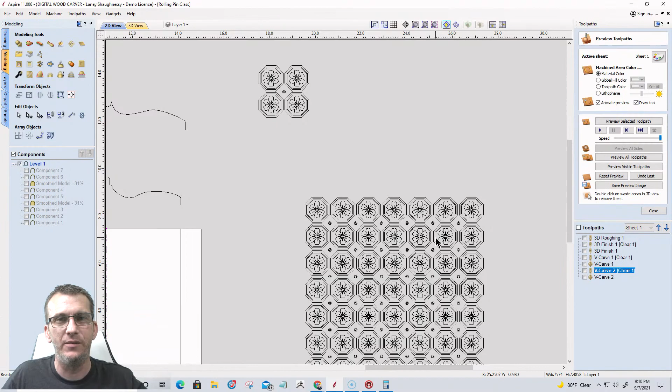All right, so fun with patterns. They don't necessarily have to be on rolling pins - they could be backgrounds and all kinds of things. Fun with patterns and geometrical shapes - think outside the box a little bit with what you're wanting to do. Let's turn on pattern A and turn off layer 1. Fun geometrical shapes and all kinds of neat things - it could be just flourishes and flowers, 3D models, little grapevines, pumpkins and Halloween stuff, Christmas trees, lions and tigers and bears, oh my - all kinds of fun things there.

Now I want to take a minute and lay out in your mind a design for a little cutting board kind of chalkboard that would hang on a wall. This would be strictly for wall decor, in your home, like in your kitchen and stuff. So we're going to start off with a very quick rectangle.

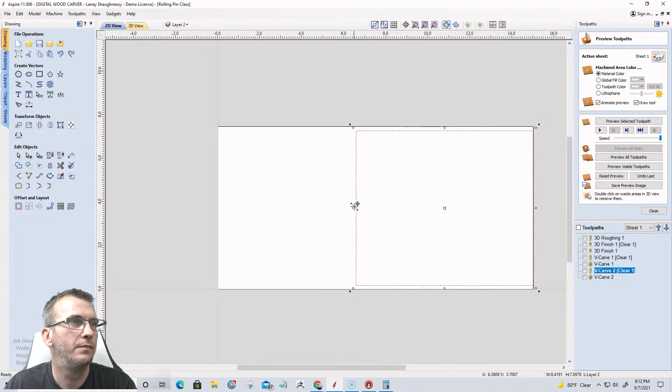Hold on, let's turn that layer off and add a new layer - make sure you're in a proper layer. Now on this rectangle, I'm going to size it up a little bit more. About like that. I want to do some radiuses - I think I'm going to go with like a 3/4 inch radius. Let's see what that looks like. There, there, there, and there. Nice, not bad. All right, let's grab another rectangle.

Let's get that centered up and down. First we'll make the big one centered up and down - make sure it's there, it is. Take this one and center that one up and down as well. Let's grab a circle - we'll get everything sized appropriately in just a moment. Let's move that over here, get it on the board there. Let's move this in a little.

All right, I'm going to take this circle and hold down Control and Shift to keep it centered on itself. Let's do that one more time - grab it right in the corner, Control Shift, centered on itself. There we go. Now, before I do any trimming to connect all these together, I want to kind of shape this a little bit sexier.

So I'm going to go into node editing mode. I'm going to grab this guy and use my arrow keys to pull this up. I'm just going to count how many clicks I'm doing - 1, 2, 3, 4, 5, 6, 7, 8, 9. Do the same thing here on this one - down arrow key, 1, 2, 3, 4, 5, 6, 7, 8, 9.

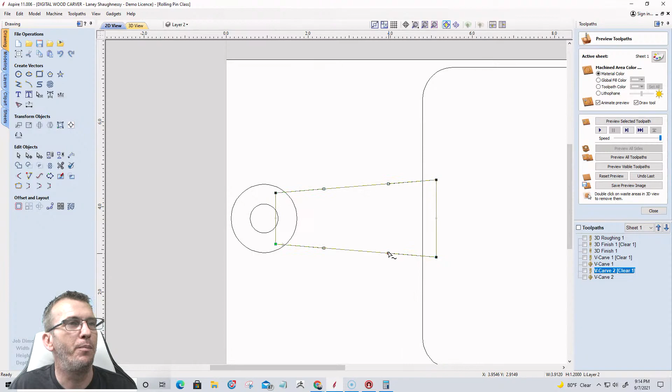I'm going to change this to a Bezier curve - this one too. I want to pull this in a little bit, to the center line there, and get that even. I want this to kind of round about there. I'm going to pull this into alignment with this here. And like I said earlier on, we can cut things in half and mirror them to create it symmetrical. But I believe I nailed it - I don't know, we'll find out.

Now I'm going to take my scissors and let's trim.

Okay, we made a little cutting board with a handle. Very quick and simple, right? Let's go in and align this to the center of the material.

Now I'm going to create another rectangle here on the inside, about like that, and let's get that centered inside of this. I want to center it inside of this. I can't center it to the center of the board because, you know, it's going to rock off and everything.

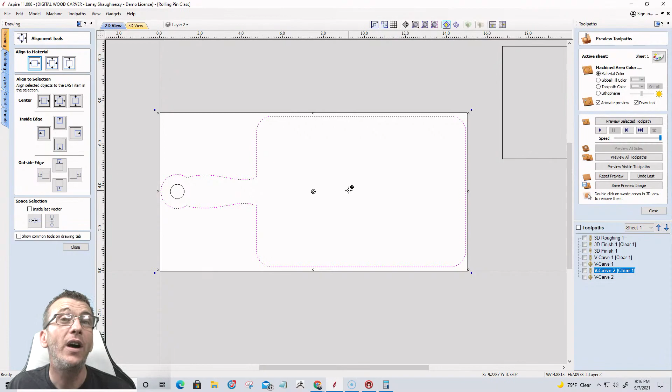Let's find out. Okay, so if I come in here and match this up. Bear with me, this is just a test for a second, guys. We're going to size this up and snap it right to that line there. Snap it right to that line there. Snap it right to this line here, and one more down here.

Now the center point of that rectangle is right here. Okay, let's put a guideline there just for reference. Come on, give me a guideline. And let's put one down this way just for reference.

Okie dokie. All right, so that rectangle missed the whole center point by a mile. Hold on there, let's put this back over. Right there. Okay, let's get rid of this one. All right, so this rectangle, it's showing the center point for this rectangle that I just drew to be right there. Now get rid of that.

Okay, and if I come in with this rectangle, grab it in the center, it's saying that there's a center point right here. Now, is it snapping that center point now just because I have a guideline? No. If I remove those guidelines...

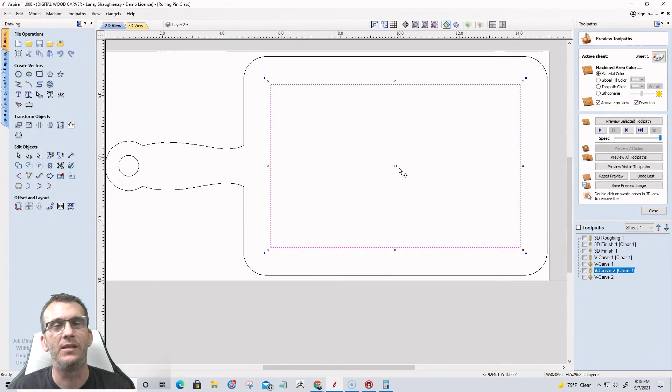So that point right there, okay, let's turn on the guideline and see if it's the same point. Oh, it is. So what it was doing is the software actually remembered that rectangle is a rectangle. Even though it has that handle attached to it now, it still remembered the center point of those vectors. That's pretty cool, I didn't think it would do that. But it actually did recall that. And I was wondering, wow, how did I snap to the center of that so well? It's because it remembered it was a rectangle before and it remembered that snapping point.

So good on Vectric for that. Okay, very cool here. We're going to go with a pocket cut. This pocket cut's going to be somewhat shallow, not very deep. We're going to go...

Let's go 0.1... let's go 1/8 of an inch. That's not deep. So we are going 1/8 of an inch, which is 3.175 millimeters for anyone working in millimeters.

Let's reset this preview. Now on the cutting board, this doesn't have to be 3/4 of an inch, it could be 1/2 inch thick or something like that. But let's pretend that this is a 3/4 inch board, which is not right. But we're going to do the pocket cut. Let's preview that, preview that visible toolpath.

Okay, now let's cut out the part. So we're going to select this and this, and let's do a profile cut. Profile cut. I'm going to go 1.25 and calculate that.

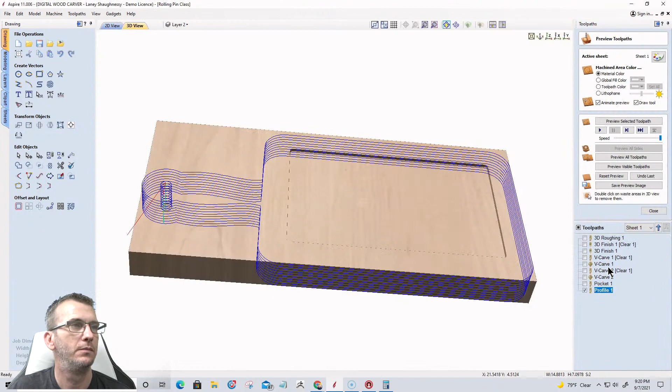Preview that. Let's see if it goes all the way through. I hope it does, hope it does, hope it does. Perfect. All right, let's get rid of the waste.

Now, imagine this being just a thin cutting board. This is wall decor, right? So it doesn't need to be real thick. Let's go 1/2 inch, 3/4 at the most. Maybe even 3/8, 3/8 to 1/2 inch. A nice little 1/8 inch pocket here.

Now, inside this pocket, we're going to use chalk paint. So we're going to prime the material first, and then apply about 2 to 3 coats of chalk paint. You can pick that up at your local big box store. Let that chalk paint cure thoroughly, give it a good couple of days.

And then take a piece of chalk, and we need to prime that chalkboard. Take a piece of chalk, on its side, and prime that board by literally marking up all that chalk paint with the side of the chalk, not the ends, the side. That's going to prime it. If you've ever been on a chalkboard where you write something, erase it, and the letters are still there, you can see what you erased and it doesn't go away—that's because the chalkboard wasn't primed properly with the chalk.

So we're going to prime it, let that sit for a few minutes, and then wipe it off with a rag. If you're going to use a damp rag, make sure you let that chalkboard paint sit for a good couple of days before you prime it with the chalk.

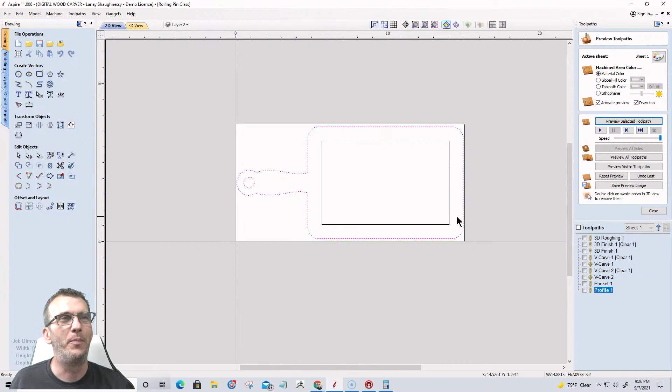But yeah, I'm excited about the little cutting board chalkboards. Hopefully you picked something up and enjoyed spending this 2 hours and 13 minutes with us. We're going to call it a night after 2 hours and 15 minutes, so I've got 2 minutes to say my goodbyes.